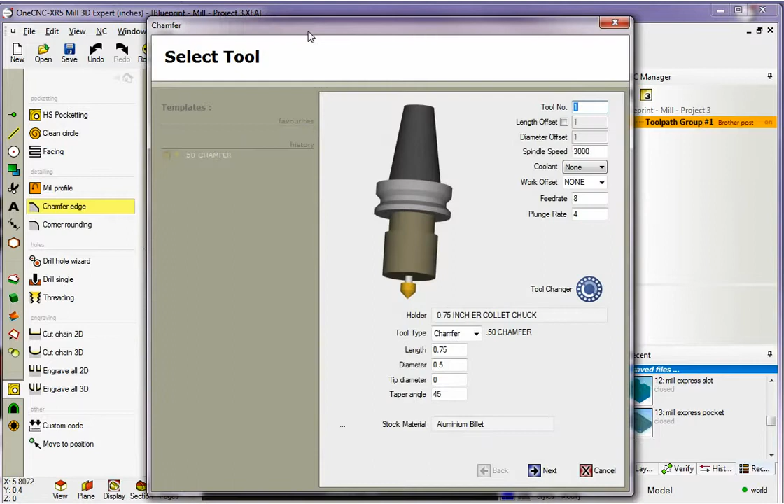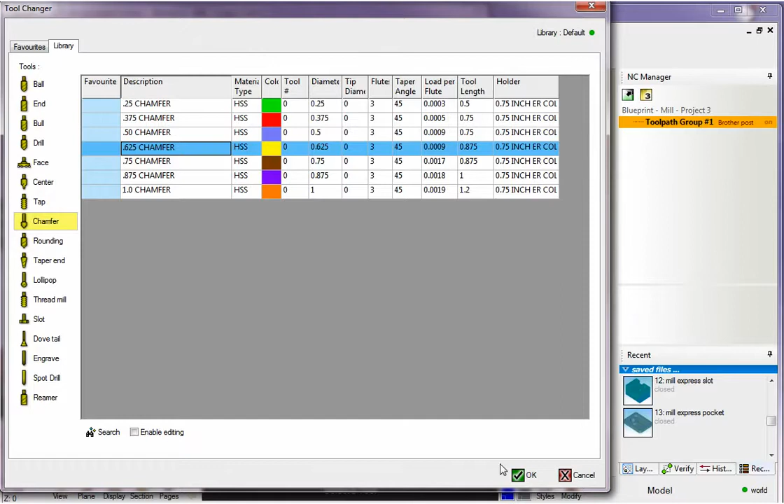Here's our select a tool. Remember, you can easily define a tool on your own by putting in the data here, or you can left click on the graphic or left click down here where it says tool changer to grab a tool from the tool library. So if I grab the library tab and come down here to chamfer, you can see here some different chamfer tools. I'll grab that one and click OK, and then OneCNC populates the values here.

I'll say that's turret position number 1. I'm going to take the spindle speed, make that 2400. We'll leave the feed rates alone. Here's our clearance plane. I'm going to have that at a 1/2 inch. You can see all this is very similar to the other machining operations we've looked at.

Now this is very important though. You have 2 options here for geometry position. You have 1 and 2. If we're selecting wireframe geometry, you want to use this option number 1. Alright? If we had a solid model, we would want to use option number 2 because we'd be selecting this bottom edge of the solid model. But because we're using wireframe geometry, just make sure this is set to 1.

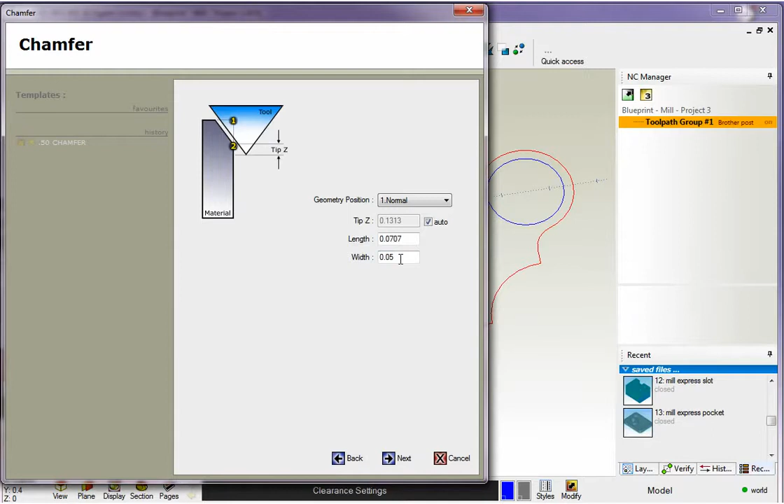The length, that's the hypotenuse distance of the chamfer. Width is the width, and that's what I'm focused on here, and I've got that set at 50 thousandths. Alright, so now we have our entry and exit for finishing. This is how we approach and exit the chamfer operation. And there's different styles. This is exactly like profiling. You have different ways to approach and exit. I'm going to say all this looks good, so we'll click finish on that, and there's our chamfer operation.

Now, why don't we simulate this? I'm going to right click on the toolpath group. I'm going to grab simulate. I'm going to use pick a boundary to determine the stock. The top of the stock is going to be at Z0. The bottom of the stock is going to be at -1. That looks good, so I'll click OK.

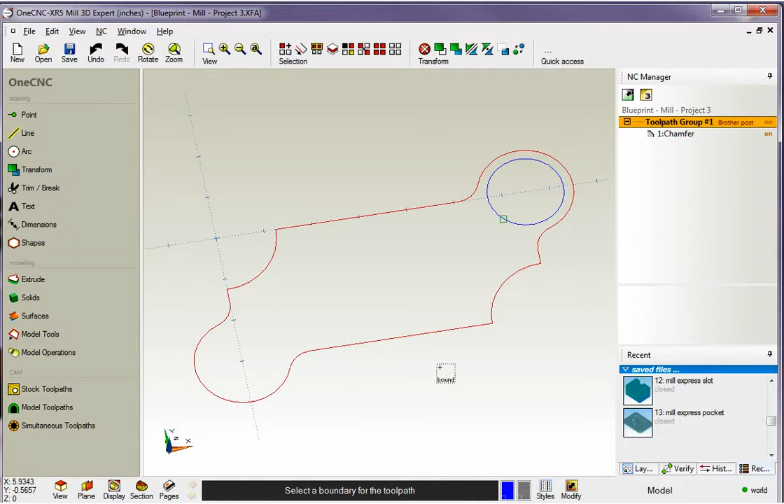And now OneCNC wants me to digitize the shape that I'm going to use for the stock. So I'm just going to left click that shape and then right hand mouse click. All right, I'll rotate that around a little bit. So there you go. There's our 50 thousandths chamfer being machined on the part. Very, very simple.

Now let's take a look at putting a fillet on here. Fillet works exactly the same way. I'm going to come over here and we're going to go to our stock toolpaths. This time, instead of selecting chamfer, we're going to go with corner rounding. And again, this works exactly the same way. You left click where you want to start.

You get your 4 arrows. The arrows determine the side and direction you want to cut. I'm going to left click that arrow because I want to climb cut the outside. I want to go all the way around, so I'm going to hit the F3 key, function key 3. I'm done selecting, so I'm going to right hand mouse click. And then here's our dialog box for selecting our corner rounding tool.

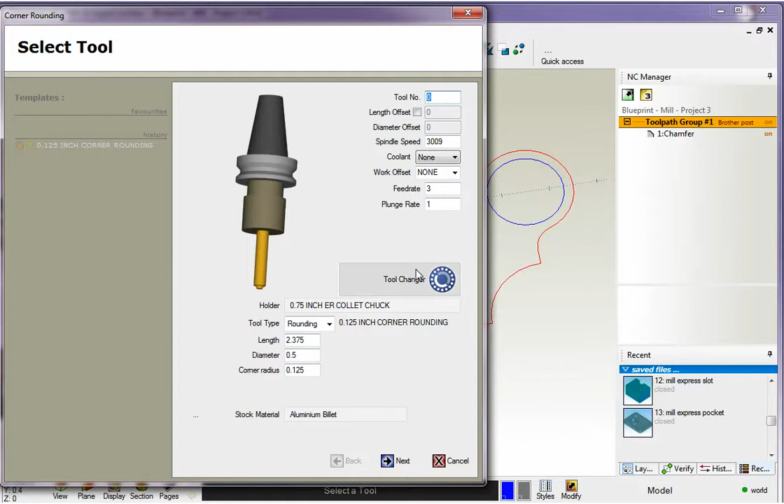Again, you can manually define a tool or pick a tool from the library. If you want to pick a tool from the library, just left click on the graphic or where it says tool changer. I'm happy with all the information there, so I'll click next. I'm happy with the clearance values. I'm going to leave those alone. And you can see this is identical to chamfer.

For geometry position, you have 1 and 2. So for wireframe geometry, I want to make sure that the geometry position is set to 1. Notice too that you can leave an offset in X and Z. I'm going to leave that alone for now. I'm going to say that's fine. And then you also have the added ability within the corner rounding operation to output cutter comp, G41 and G42, if you'd like. I'm going to leave it set to automatic though, which is no cutter comp. We'll click next on that.

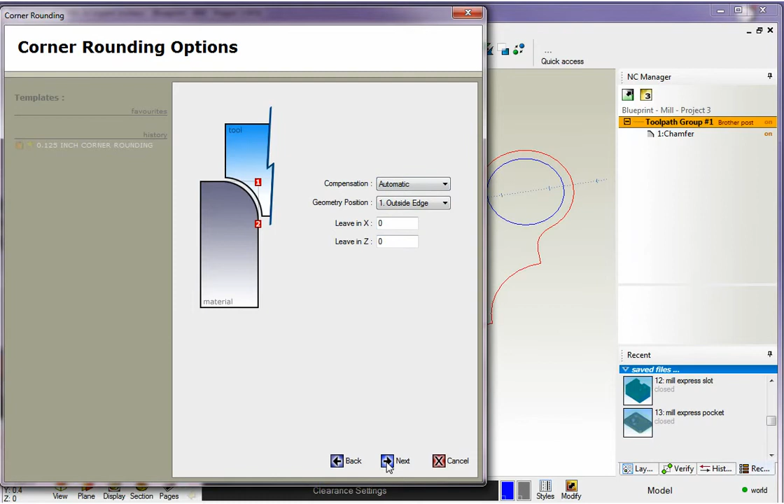Here's our lead in and lead out. This works just like profiling also. I'm going to say all this looks good though. I might change that to 0. We'll click finish. And there's our corner rounding operation. Let's simulate that. So I'm going to right click on the operation, just on the corner rounding operation. We're going to go with simulate.

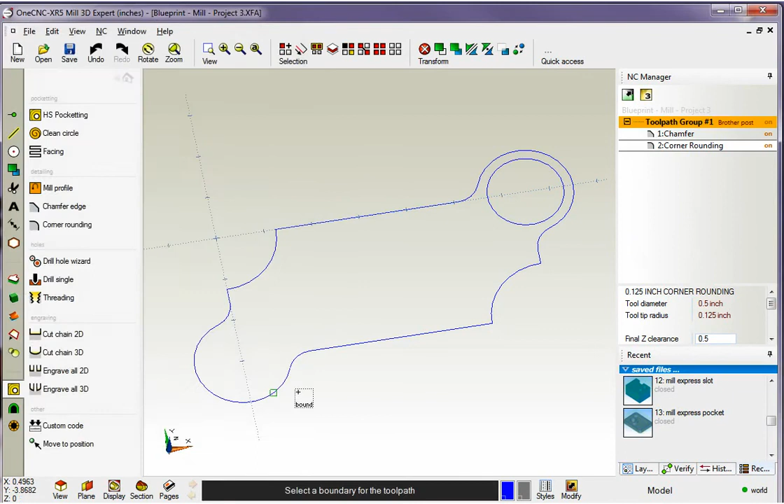I'll leave those values alone. Again, we'll left click that shape for the boundary. And then here is our corner rounding operation. So very, very simple, just like the chamfering. And you can see it's applying the corner round on there.